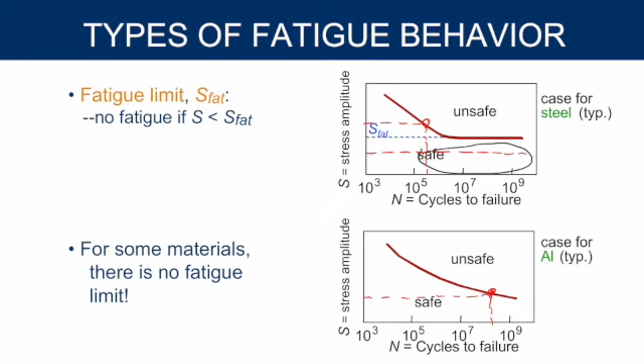Okay, so the whole idea is that cracks will grow incrementally. We're adding energy to the system when we put a force through a distance on a material. That energy has to be dissipated, typically through crack growth. Or the other way would be for the radius of curvature of the void to expand. That would dissipate the energy as well, and that would be a material that can self-repair. But in most cases, we get crack growth, which causes failure.

Okay, so let's take a look at this. So we model this as the change in the length of the crack over the number of cycles gives us a change in the K constant. This K constant was A over rho sub t to the square root, and this will also grow because the length is growing over time. So this is equivalent to a change in stress, which is related to the square root of the length of the crack, the change in the length of the crack.

Okay, so we can model that, like I said before. There's a toughness value that can be defined for any material, K1C. That number is essentially constant, but it's the crack propagation that changes, and that's related inversely to the stress that the material can handle. And this says sigma c is the critical stress, so essentially it's the yield stress that would cause failure. Okay, so what happens here is even though the K may be smaller than it was the material originally had, over time that will grow and the cracks will propagate.

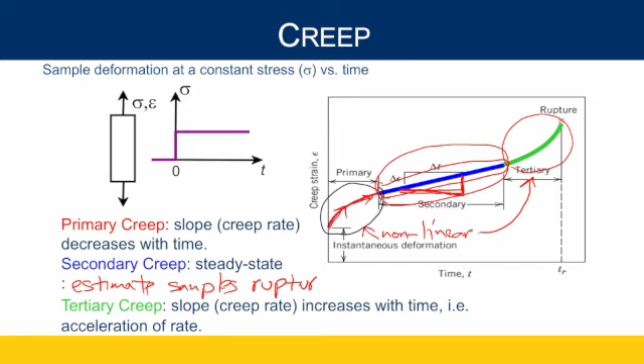So how does creep respond? Again, it uses the same equation we've used in the past: if we increase the temperature of a material, its likelihood to creep or change length with constant stress increases exponentially. We're using the exact same equation we've already used about three or four times in this class. This time it's the rate of strain, deformation with respect to time. We have our K constant we've talked about, and stress exponentially changes with the inverse negative of the temperature.

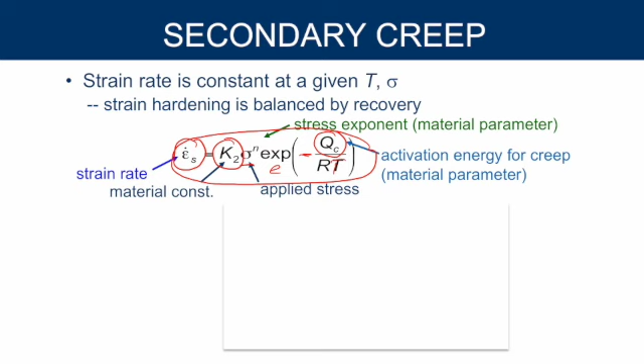So again, there's an activation energy for creep, a number you would either experimentally find or look up in a table. And you have the exponential corresponding to temperature. So what does that look like if we graph it out? If we take the natural log of each side, we can get a straight line, which has a constant slope. So the word I just used may be useful for the question I asked previously.

And as we see, as temperature increases, the amount of stress needed decreases dramatically, which means the strain increases dramatically with temperature. So you need less stress, you get more strain. That's what this equation says, right? An exponential increase in strain. The other way to look at it, since stress and temperature are on the same side, they're inversely proportional to each other.

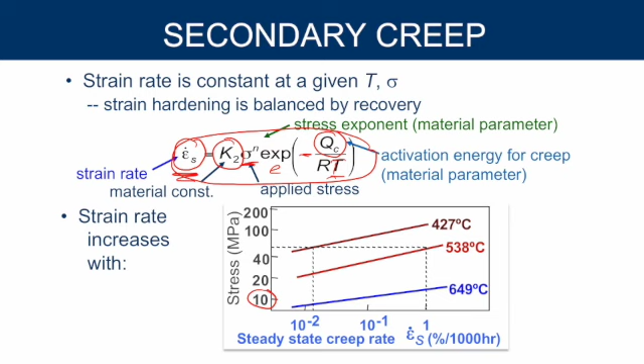So if we want something to strain or fail in creep, if we heat it up, it'll strain much quicker. Okay, so let's do an example of that.

Again, instead of using the calculation, a lot of these materials have been tested for creep - different types of iron, different types of steel, alloys - and they create tables that essentially take the exponential result and graph it so that we can just read off the numbers we're looking for with respect to temperature, rupture time, and stress.

So this is an example of one of these graphs. This one is for iron, and this is the graph of stress. Stress is on the y-axis. On the left side it's in megapascals, on the right side it's psi. You'll see that a lot, especially when we get into other calculations, especially phase diagrams - different units on the two axes so we can do easy conversions from one to another. On the x-axis we have a constant, an equation that solves for a value related to how long it takes for a material to rupture and its temperature. In this graph, the temperature is in Kelvin and the time is in hours.

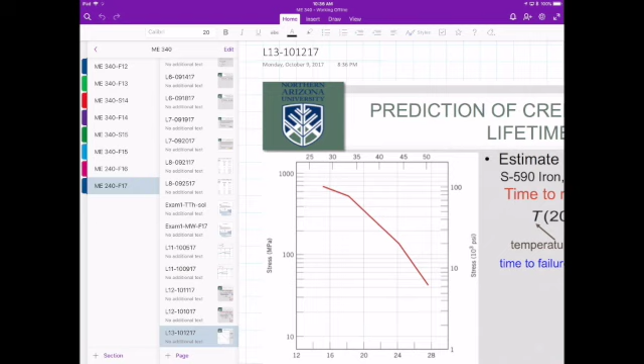So I have a question here. If we have a temperature of 800 degrees C and a stress of 20,000 psi, how long will it take to rupture? So we have our prediction of creep.

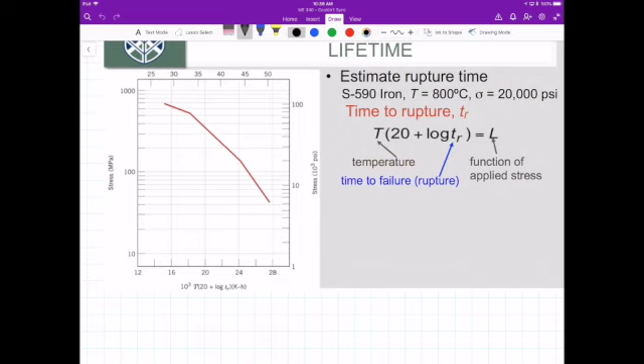Let's do a calculation here. Okay, so let's put down our givens from the problem.

This is an S590 iron. That's basically talking about how it was processed and the type of impurities in it. We'll get into some of the numbering for alloys later in the class.

We're given an x-axis related to temperature, 20 plus the log of the rupture time, in Kelvin hours, that comes right from here. So that's our dependent variable. We'll plug in the psi on the y-axis, and we can determine the temperature and time from the x-axis.

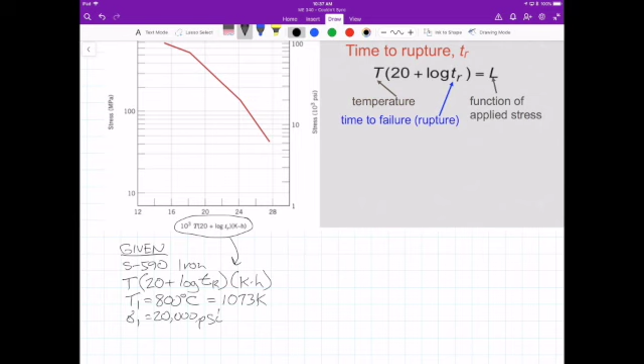Temperature given was 800 degrees C, which is 1073 Kelvin, so I'm converting that over. We're given a stress of 20,000 psi. We don't have to convert this to megapascals because it's already labeled on the y-axis on the right side. The left side is megapascals, so it basically converts for us.

I'm also going to add a second temperature. What if we drop the temperature 50 degrees C, which is pretty minimal for a metal? This would be equivalent to 1023 Kelvin. As we should predict, higher temperatures exponentially increase strain, which decreases the time to rupture. So a small drop should exponentially increase the time to rupture. Let's do that calculation and see what we get.

Okay, so the solution. Let's move this up so we can see all our numbers and our graph. We have 20,000 psi, that's our given. We just need to look that up on the graph.

So this is a log scale. We're going to see these log scales quite a bit from now on. Phase diagrams use them quite a bit as well, and a lot of the time-temperature relationships we'll talk about in class use log scales. So let's have a quick reminder of how these work.

They're based on powers of 10. So the first one would be from 1 to 10. Each hash mark would be a value: 1, 2, 3, 4, 5, 6, 7, 8, 9, 10, and they get spaced much closer as you get closer to the next 10's value. So the next group, 10 to 100, we have to count by 10s instead of 1s, so it'd be 10, 20, 30, etc.

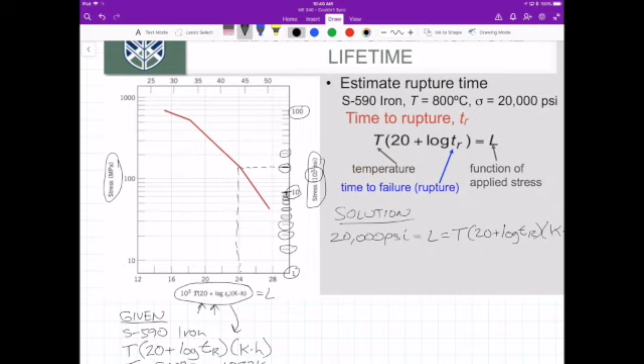This converts to what's called the L value. The L value in this case is the relationship temperature, 20 plus the log of the rupture time, in Kelvin hours. L can vary with the different types of metals you're using, so you need to make sure you understand what your x-axis is for whatever graph you're using, because this can vary with respect to the material you're testing. In this case, it's 20 plus the log of rupture time.

So all we have to do is solve for the rupture time, we have all the information we need. L is taken off the x-axis, and it's the value of 24. Look at the units, it's 10 to the third, so it's actually 24,000. So we're converting this number to an L, and that's what we use to solve.

So we use our L value, 24,000, and that equals our known temperature, 1073, times 20 plus the log of the rupture time. With that, we can solve for the rupture time. When I do that, I get 233 hours.

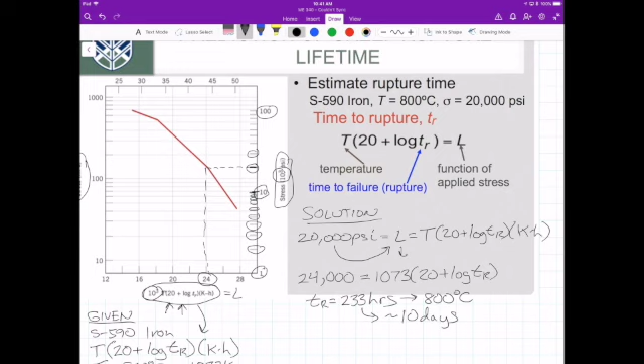Like I said, this is in hours, not seconds like diffusion. This is for 800 degrees C. How long is 233 hours? 240 hours would be 10 days, so it's approximately 10 days. So at an elevated temperature, if you stress iron at 20,000 psi, it'll rupture in 10 days. Okay, so that could be a problem.

What happens if we drop the temperature? We're not dropping it very much, just 50 degrees. We're going down to 1023 Kelvin. The equation's the same, 20 plus the log of TR. We're applying the same stress, so our L value is still 24,000.

And then we solve for TR again. So our second TR, call this TR1, this is TR2. Our second TR, just a 50 degree drop in temperature, I get a much larger time: 2,890 hours. This is at 750 degrees C.

This is approximately, let's see, 2,400 would be 100 days, so this is probably about 120 days approximately. So just 50 degrees decrease, same stress being applied to the material, the material lasts 12 times longer.

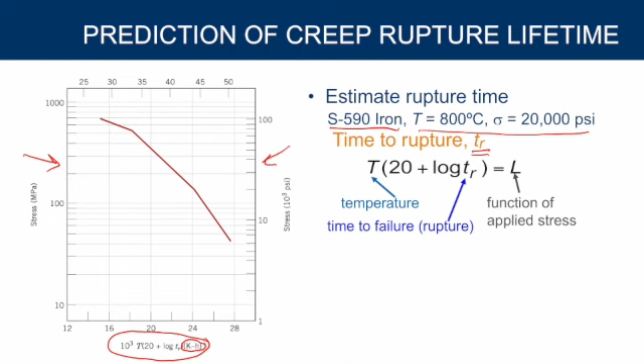Okay, so let's go on. All right, so I think now we're ready for phase diagrams. Yeah, all right, so we're moving on to chapter 9. Chapter 9, we're talking about phase diagrams.

So this is how we determine creation of solid solutions, what temperatures we can create solid solutions. If we have too high or too low of a temperature, materials are going to have more tendency to dissolve into each other. If we add too much of material, we'll get a mixture. And again, if we heat that up, we can change when the mixture becomes a solid solution. So it's similar to what we've talked about before.

If you're putting sugar into water, if you do that at room temperature, a lot of the sugar will drop to the bottom of the volume you've created. But if you heat it up, you can dissolve more of the sugar. Same thing with metals: if we put in impurities like copper and nickel, we can increase the tendency for copper and nickel to interact by variations in temperature. Then obviously the ending result is if we heat it high enough, we'll melt it.

So phase diagrams show us the melting points, the liquid phase, the solid phase, and the solid phases if things precipitate out into various regions. Okay, so we're going to be able to determine temperatures at which these occur, how many phases exist for a material over a temperature and concentration range.

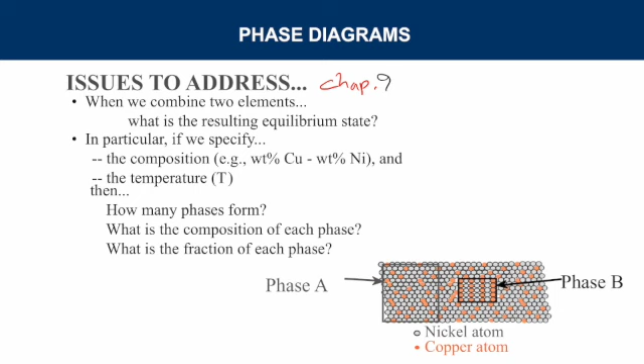All right, so solution versus mixture - this is what phase diagrams help us to determine. A solution, like we said, is a single phase. You add an impurity or a solute to a solvent. They mix together and have a single property if they're miscible together. Whereas a mixture, if we put in one phase and another phase, they don't mix, we'll get the two separate phases.

And the sugar water is a good example. If I put too much sugar in, I will still have sugar on the bottom of my volume, and I will also have water, a sugar water solution. So I have two phases. Okay, so there's limits - limits to the amount of each material we can add together, where they'll become a single phase solution versus when they separate out into two phases.

Okay, so in this example, if I heat a material at 20 degrees - so this would be room temperature - and I add sugar, this graph shows me that I can add about 65, 63% sugar to water, and I will get a single phase. That single phase is listed as liquid solution. You'll always see this on the phase diagrams.

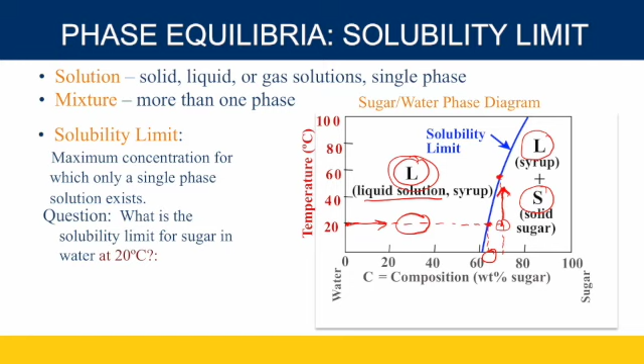Here's an example of types of phase diagrams, and it's important to understand the difference between these. If we have a one component system, which say would be water, water can go through three different phases: solid, liquid, and gas. This would be called a unary diagram. That means we're talking about pure water. There's no impurities, there's nothing else added to it, no other component besides the water. So unary, una means one, means the number of components, not the number of phases. Because a water phase diagram has three phases, solid, liquid, and gas, but unary refers to the number of components, not the number of phases.

The one we're going to talk about the most in this class are binary diagrams, which would be two materials mixed together to create an alloy. So copper, nickel, carbon, iron - those are the ones we're going to spend a lot of time on. Again, these can have multiple phases - you can have 4, 5, up to 10, 15 different phases on these diagrams. But if it's two components, it's a binary diagram. Three components or more would define complex alloys.

We need to understand what these look like, but we're not going to use them very much in class. A 3-component phase diagram is called a ternary diagram, and in that case it's a 3-dimensional diagram. They look pretty cool, actually. You have one component on the x-axis, the y-axis has two components, and then in the z direction you'll have your third component, creating a kind of surface mapped phase diagram in 3 dimensions. When they create alloys with more than 2 components, the third component is often a very small amount, so they'll add that amount and redraw the phase diagram at that region for analysis. So you can turn a ternary diagram into a binary diagram by holding one of the compositions constant. That's usually how those work. As long as we know how to read a binary diagram, we can understand ternary and other more complex diagrams.

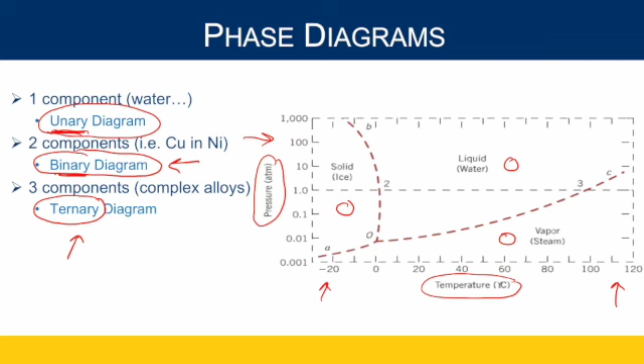How do we visualize the different phases in alloys? Again, we're going to talk about binary diagrams, so we're going to have 2 components graphed on the x-axis as a weight percent. If I have, say, 50% aluminum, I can automatically calculate the amount of copper is also 50%, so I can always go back and forth between them because they have to add up to 100. If aluminum is 80%, copper would be 20%. So one question for you that you can add to for extra credit is, what if I had 90% copper in my component?

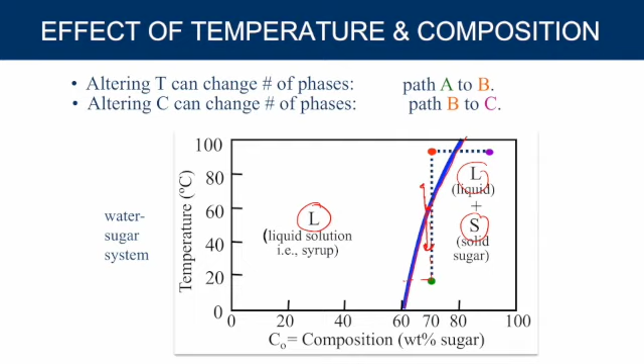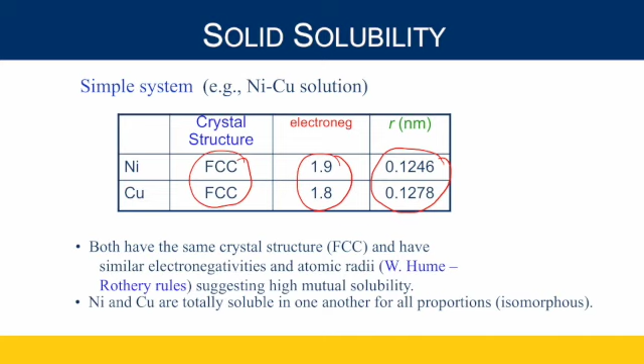Okay, so let's look at the phase diagram for copper nickel. This is a binary phase diagram because it has nickel and it also has copper.

Always read the x-axis. It tells you from 0 to 100 that we're talking about weight percent nickel. How do I figure out weight percent copper? If I just flip the numbers, 100% to 0, going in this direction, this would be the weight percent of copper, right? Because they always have to add up to 100. So if I have 80% nickel, I have 20% copper, 40% nickel, 60% copper. At any point, I always know the weight percent of the other component because they're binary and both components have to add up to 100.

So weight percent is on the x-axis, temperature is on the y. A lot of times you'll have Celsius on one side, and maybe over here degrees Fahrenheit. Also the x-axis at the top will be atomic percent, so we'll have weight percent and atomic percent. We can convert those, like we talked about before—if you multiply through by atomic weight, you can go back and forth between weight percent and atomic percent. A lot of times these graphs will convert those for you, which is kind of nice.

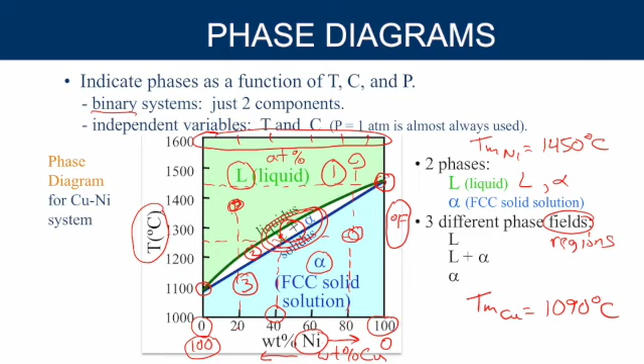But when I'm in the middle phase, it varies, right? Because some of the copper is pulled into the solid, most of the copper is in the liquid phase, and we can calculate that as well. Okay, so let's go on how to do that. Okay, so our phase diagram.

Let me take a look here.

There's one definition I want to go through first before we start calculating weight fractions and things like that. Nickel-copper phase diagrams are called isomorphous. Isomorphous means that you're completely soluble at any weight percent from 0 to 100. This is very rare. Copper and nickel have very similar properties, so they are very miscible with each other, which means they're isomorphous. Most materials are not isomorphous. There are very specific ranges. If you put too much of one into the other, you're going to get two phases of solids. So isomorphous is pretty rare.

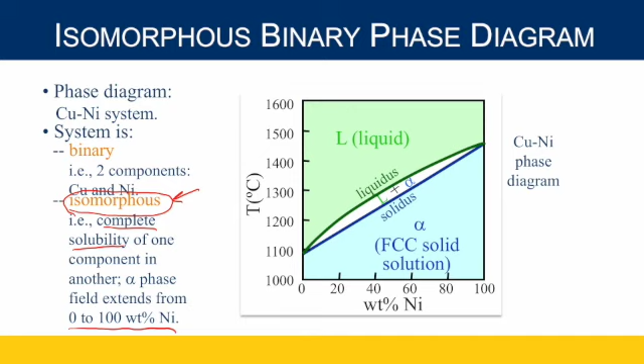So what are the rules for measuring weight fractions, compositions, and temperatures off of phase diagrams? The first rule is if we know a temperature and an initial concentration, we can determine how many phases are present. We move in the x direction and find the concentration, we move in the y direction and find the temperature. We put a point right there, and then we can see what phase region we're in. So we know the number of phases that exist as well as what region we're in.

Second rule: if we know temperature and initial concentration, we can determine the composition of each phase. We go with the concentration to a temperature. If it's a single phase region, we can read the composition right off of the x-axis. But if it's in a dual phase region, we have to do a fractional conversion, and we'll go over that in a minute. The last rule is if we know a temperature and initial concentration, we can also determine the weight fraction of each phase.

So the composition for, say, copper and nickel would be the weight percent copper, the weight percent of nickel. Whereas weight fraction would be the percentage, has no units, it's not weight percentage, it's a fraction. It would be the percentage of each phase that exists. So if we have a liquid and a solid phase, we can calculate the percent liquid and the percent solid. Whenever you add these numbers up for binary diagrams, the weight percents have to equal 100%, and the phase percentages also have to equal 100%.

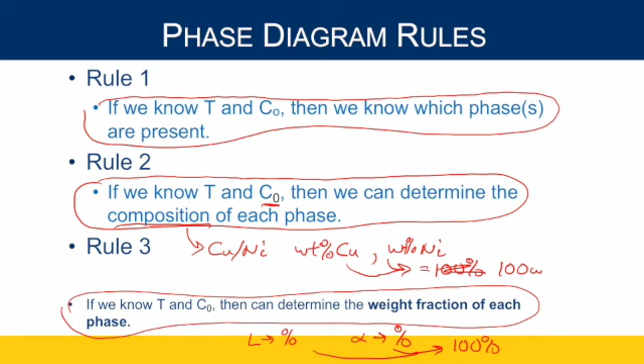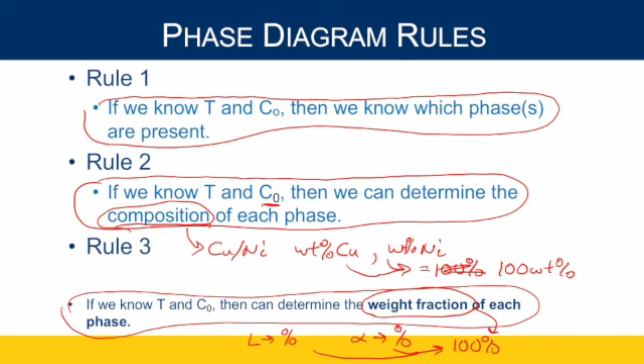Okay, let me just rewrite this. This would have units, weight percent for composition, whereas weight fraction does not have units, it's a fraction. That'll be important as you go along, because if you write those incorrectly, you will lose points on homeworks as well as tests. So you need to make sure you understand the difference.

So what's happening in these phases? So we have this phase diagram. This is our copper-nickel phase diagram again. We're just looking at a small region, and you'll see this a lot with a lot of our phase diagrams. Say, copper and nickel, carbon and iron is a good example. To make steel, there's a very small range of carbon that can be added to iron to create steel. So there's really no reason to show the entire phase diagram from 0 to 100. They only show a very small region because that's the only usable region. The other parts make unstable materials.

So what's actually happening to the material? Let's start with the liquid phase. We've heated up to, in this case, we're at about 35 weight percent.

Nickel. And if we heat it to 1300 degrees, the entire copper nickel is liquid. They're one phase, one liquid phase. If we looked at them, it'd be like looking at a cup of water - one phase, one water. It's our copper nickel solution.

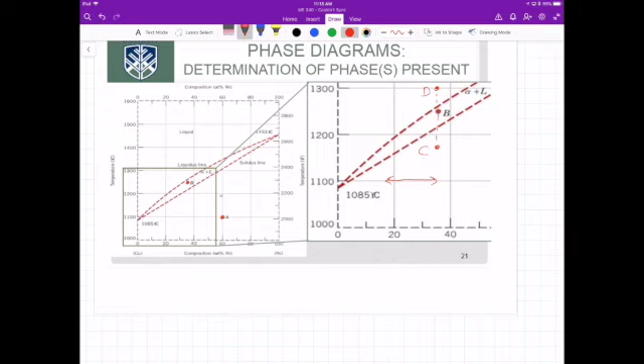But temperature is something we can control. We can take our material, 60% nickel, and we can heat it up and down and change phases. All right, so let's go through these rules using this phase diagram.

So the first rule: if we're given a temperature and an initial concentration. The initial concentration is the metal that I purchased, known to have, say, 60% nickel in it. That's not going to change. Even if I change the temperature and move into different phases, overall there's still 60% nickel. The only thing that happens is some of the copper moves into one phase and less copper moves into the other phase, and that's what we're going to be calculating. But overall it always adds up to the initial concentration, what you purchased from the vendor. So the first rule: given a temperature and initial concentration, we can determine the number of phases.

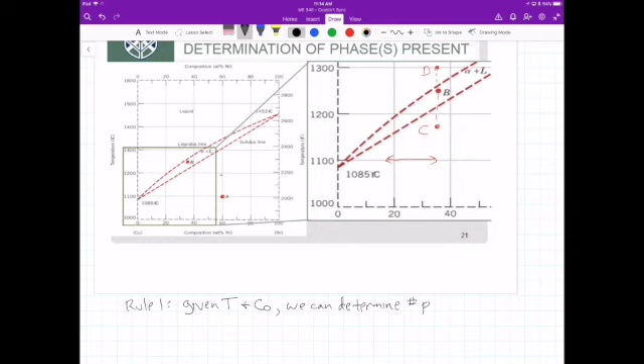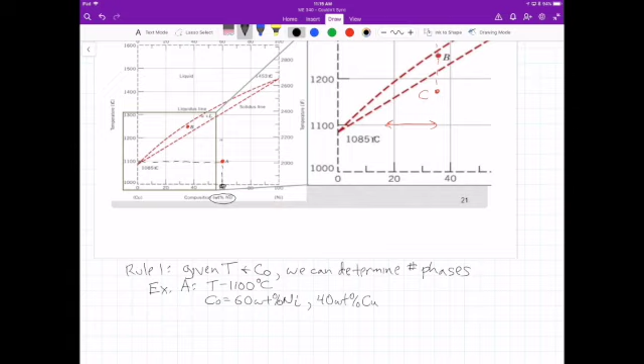All right, so let's use point A as our example. We are given a temperature, right? To get to point A, it has to be 1100 degrees Celsius. And our initial concentration we can read off the graph at any time. That doesn't change. So our C naught is 60, look at my x-axis, 60 weight percent nickel. So how much copper do I have? Subtract it from 100, 40 weight percent copper. You can always calculate the other component just by subtracting from 100.

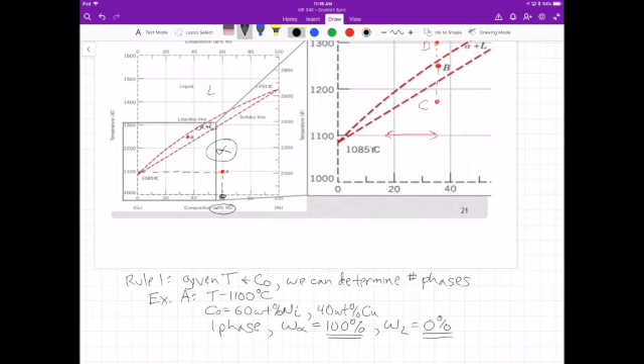So how many phases exist here? They're labeled: I have alpha, this is alpha plus liquid, and this is liquid. There's only one phase in this region. A is fully in that region, so our answer is one phase. The way we write that is the weight fraction of each phase, we call that W, and we write the phase's Greek letter. In this case it's alpha. So the weight fraction of alpha would be 100% because there's only one phase. The other phase that can exist on this diagram is liquid. What would be the weight percent of liquid at this temperature? Hopefully this isn't a trick question, because just like compositions, the weight fractions have to add up to 100. If I already have 100%, the liquid obviously has to be 0. And you can see that off the graph, we're well below the line of melting, therefore there is no liquid, therefore 0 is our answer for the other phase. So if you have one phase, that weight fraction is automatically 100%.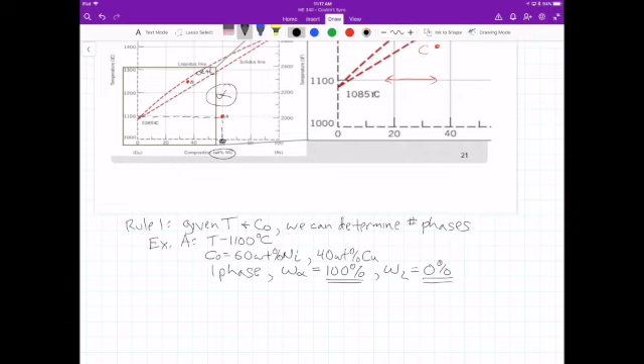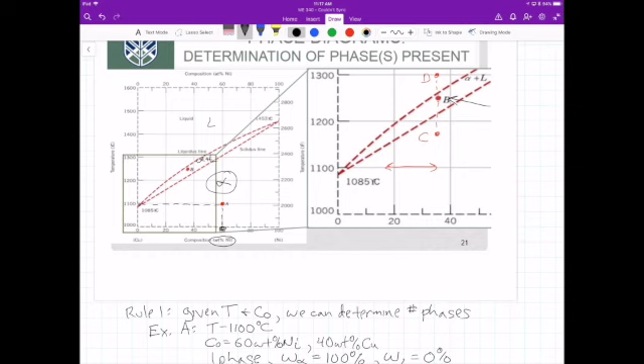All right, so let's do point B. I'm going to zoom in, let's use this side, it's a little easier to see B on this bigger graph. How many phases exist? Rule 1: we're in the alpha plus liquid region, which means we have 2 phases.

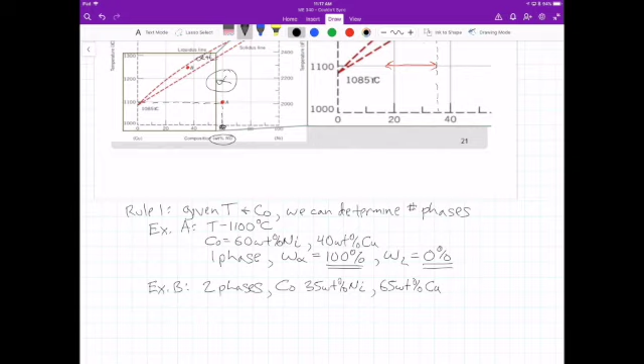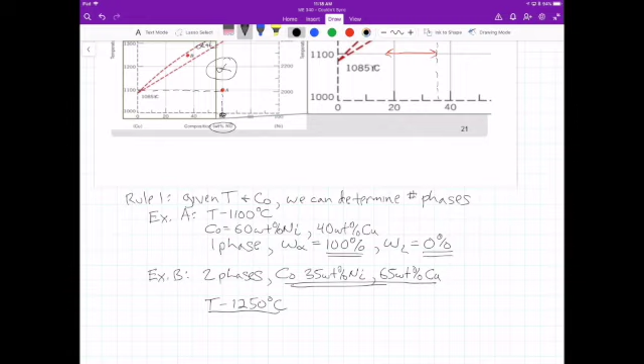And what is the initial concentration? Again, the initial concentration doesn't change, we always just go straight down and read it right off the graph. In this case it's 35 weight percent nickel, which means there's also 65 weight percent copper. And what's the temperature? We had to have a given temperature and initial concentration. We have the initial concentration. The temperature of B, just go horizontally, is at 1250 degrees C. So with a known temperature and concentration, we can see the number of phases.

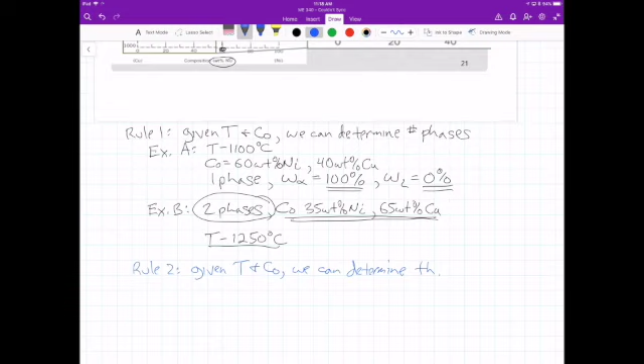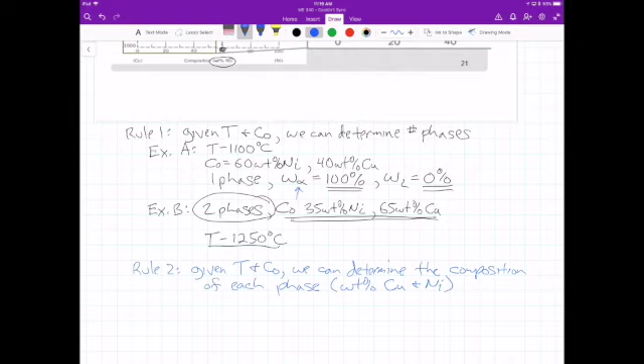So that's rule 1. Rule 2: given a known temperature and initial concentration, we can determine the composition of each phase. Composition is weight percent of the material, in this case copper and nickel. Whereas the amount of each phase is not a weight percent, and it's not related to the amount of nickel or copper, it's the amount of solid or liquid, and it's a fraction.

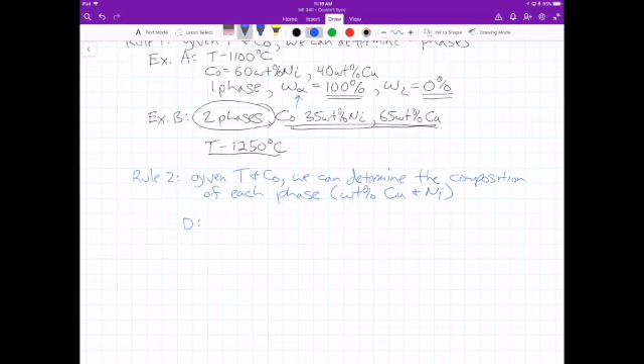Okay, so remember that. All right, so let's do point D. We're given a temperature and concentration. Since point D is listed, we can get that. The temperature is 1300, composition is the same as the other point, 35%. Let's write that down. So temperature equals 1300 degrees. Initial concentration is still 35 weight percent nickel, 65 weight percent copper.

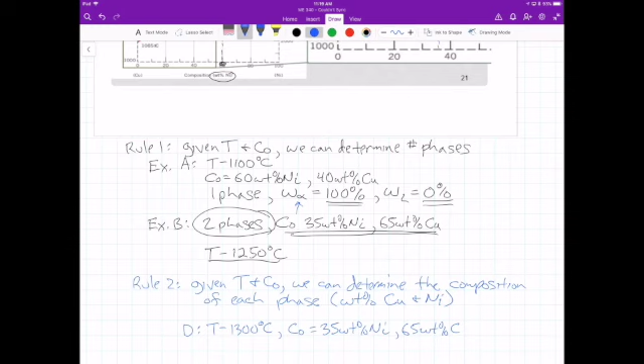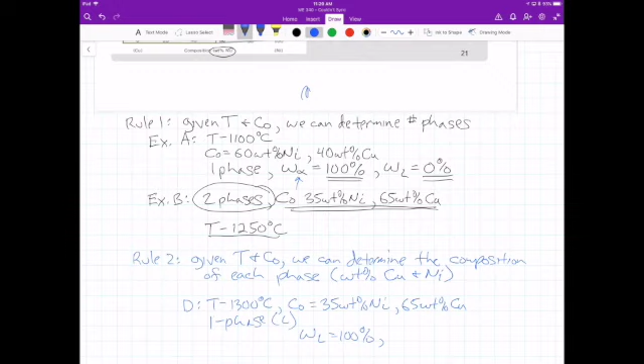How many phases exist at this temperature? We're in the liquid phase region, so we have one phase. That phase is all liquid. So if we're going to do weight fraction, we do weight fraction of liquid equals 100%. The weight fraction of solid would be what? 100 minus 100 is 0. So there's no solid at this temperature.

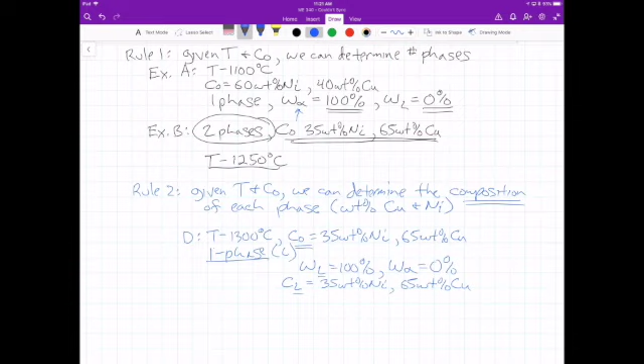If there's only one phase, then my initial concentration also equals the composition of the phase. So if it's all liquid, then the concentration or composition—you can use those interchangeably—of the liquid would be 35 weight percent nickel, 65 weight percent copper. So the subscripts we use are important because they determine what phase we're in, what material we're talking about, and we can compare them that way.

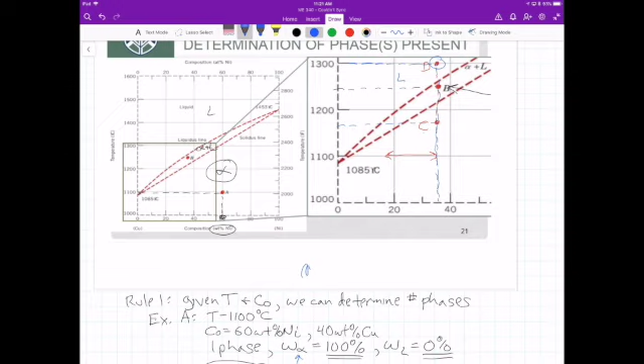Okay, so let's do point C for rule 2. Point C, we're down here now. Looks like we're at about 1160 degrees—let's say 1170. So temperature is approximately 1170 degrees C. The initial concentration is still 35 weight percent nickel and 65 weight percent copper, right?

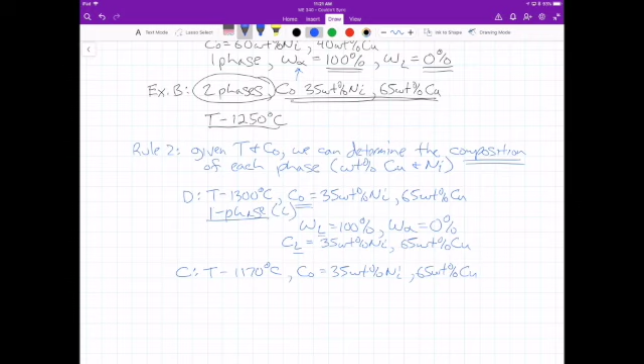How many phases exist? We're in the alpha phase. There's only one, so everything's solid. So we have one phase. That phase is alpha.

So if that's the case, the weight fraction of liquid, weight fraction of solid—if we're completely in the solid phase, there's one phase, we have to have 100% of that phase, which means we have 0% of the other phase that exists. And again, the concentration, since there's one phase, is the same, but this time the concentration is in the alpha phase, and that would be 35 weight percent nickel, 65 weight percent copper.

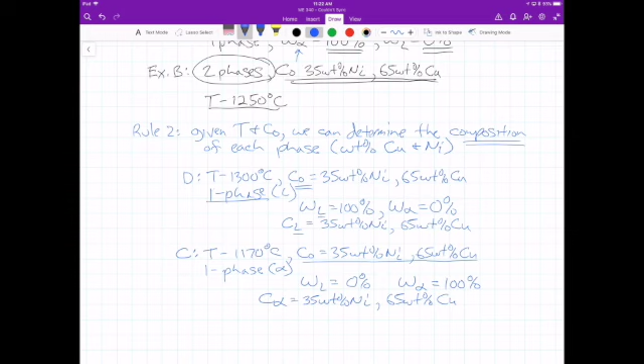So let's look at B. Point B gets a little more complicated, but the math is actually very simple. What's going on at point B? We are in the dual phase region. We have liquid and solid that exist in this region. Okay, let me write that down first.

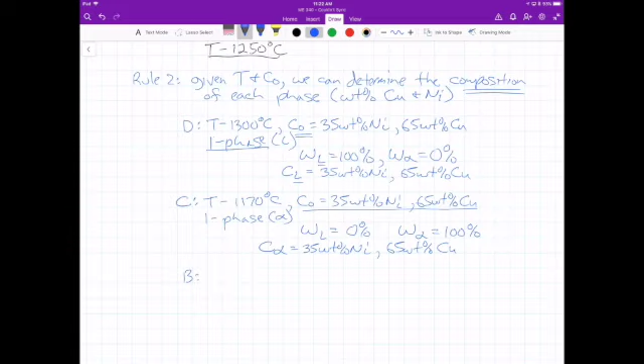We're at a temperature—let me write the temperature real quick, sorry. Looks like about 1250. Temperature, 1250 degrees C. We have two phases, liquid and solid. Our initial concentration, like I said, is always the same. We bought this material at 35 weight percent nickel, 65 weight percent copper, and we're just changing the temperature. But how much of each of these materials exists in each of these phases? That's what we need to calculate.

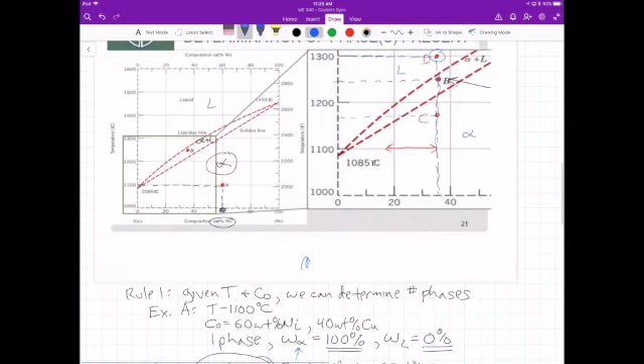So since we have two phases, we have two concentrations. We have concentration alpha, and we have the concentration of the liquid. This is really easy. When we have two phases, we just have to go horizontally until we reach the phase lines. So we're in the dual phase region, we go horizontally until we reach a phase boundary. The phase boundary on the left is the liquid phase boundary. The phase boundary on the right is the solid phase boundary.

So to measure the composition, the amount of nickel and copper in each of these phases, we just go straight down from the phase boundary, and that gives us the value for each one, right? So if I go to the left, I hit the liquid—this is the concentration of nickel in the liquid. If I go to the right, to the solid line, this is the concentration of nickel in the solid. So what would those values be? Looks like about 32 here, and this looks like about 45—let's say 44.

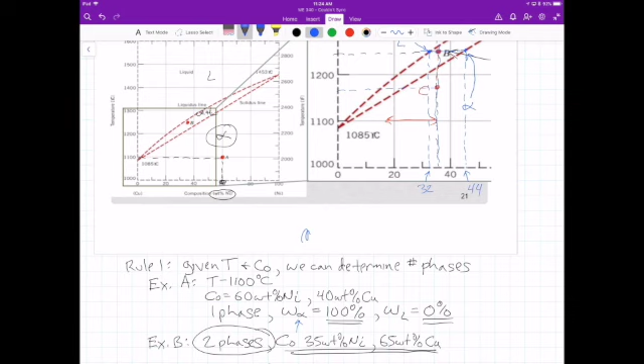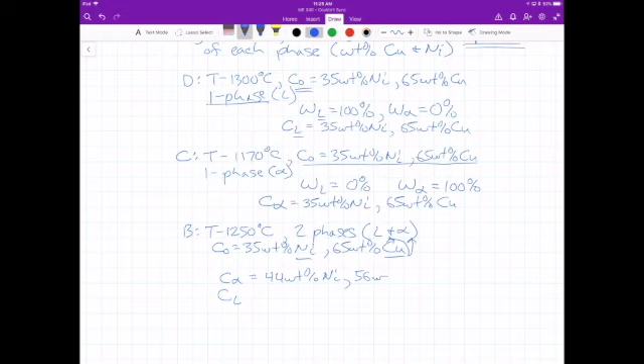Okay, so how would I write that? The solid phase was 44, so 44 weight percent nickel. How much copper do we have? 100 minus 44, 56 weight percent copper. The liquid line, we go to the left and then down, we get 32 weight percent nickel. How much copper do we have? 68 weight percent copper. So what does this mean?

These values—again, the initial concentration, like I said, is always the same. So what we're seeing is there's a tendency for more nickel to be solid than its initial concentration, and less nickel to be liquid than this initial concentration. So this is just a fractional average. The weight fraction gives us the amount of each, and if we multiply the weight fraction by the concentration and add them together, we will get this number.

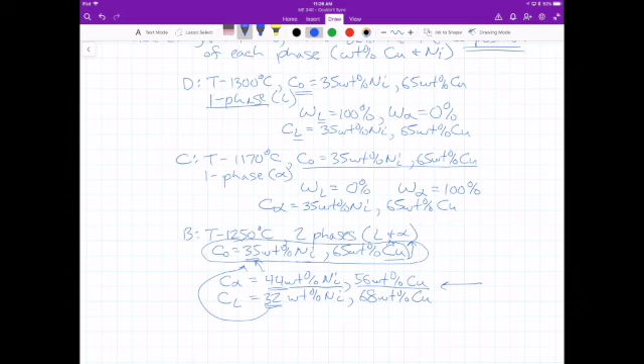So we have our composition or concentration of each. When we have that, it's always in weight percent, and it has the element, the component that is added as part of the units. So there's our answer for that one.

Then rule 3 was the weight fraction calculation, so let's do that one. Go back to black. Rule 3: if we have a given temperature and initial concentration, we can determine the weight fraction of each phase.

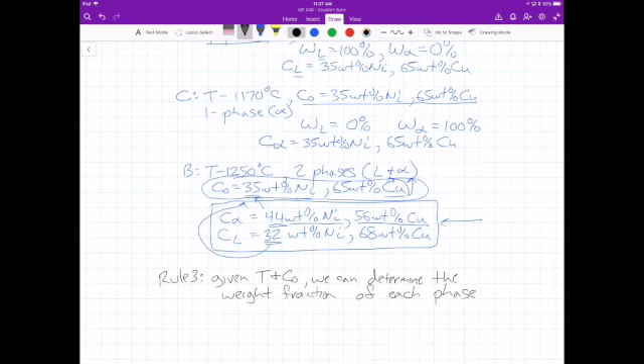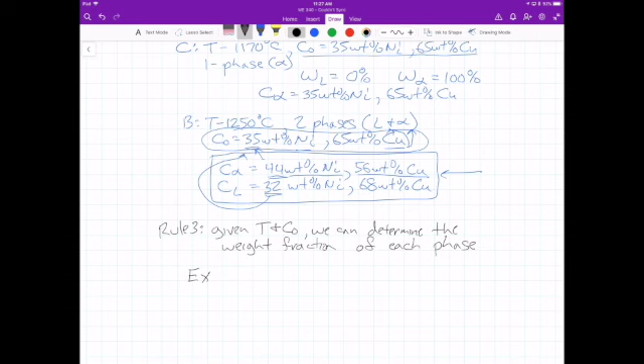Okay, let's just do point B, because that's the only one that has multiple weight fractions. We already wrote out the weight fractions for C and D and A up here, right?

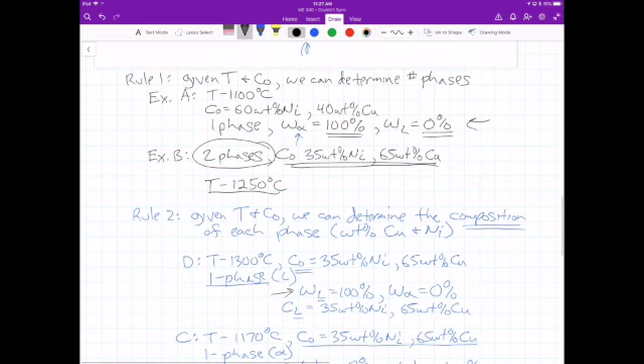D was 100% liquid, 0% solid. C was 100% solid, 0% liquid. And then A was way up here, it was 100% solid, 0% liquid as well. So those are already calculated. One phase, you already know your weight fractions.

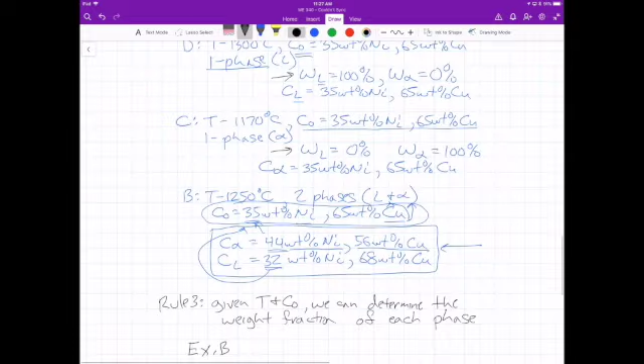For this, we need to use the lever rule that I talked about. So let's look at this line, I'll try to draw it in different colors here. We have a distance from our point to the liquid phase line, and a distance from our point to the solid phase line. Let me just draw this off to the side. We have a line, got the red, we have our point, and we have the green, and we have our phase boundaries on each side. This is what we use to calculate weight fraction, and it's the lever rule.

Because basically, like sum of moments, if you want the liquid side, you use the opposite length. If you want the solid side, you use the other length. Okay, so what does this mean?

At this point, is there more liquid or solid? The liquid line is on the left. We use the line on the right, which is longer than the other line, which is the solid line. So that means there's more liquid in this.

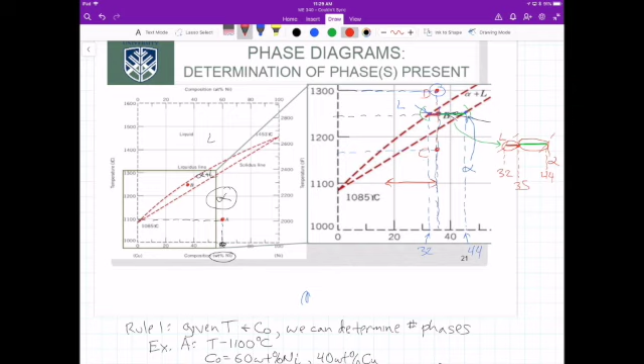So how do we calculate that? We need to know the composition values, the 32 and the 44, and we need to know our initial composition, the 35 that we were given for this material. If we have those numbers, we can calculate the lengths of the lines, right? So we just subtract the differences, okay, so I would do that.

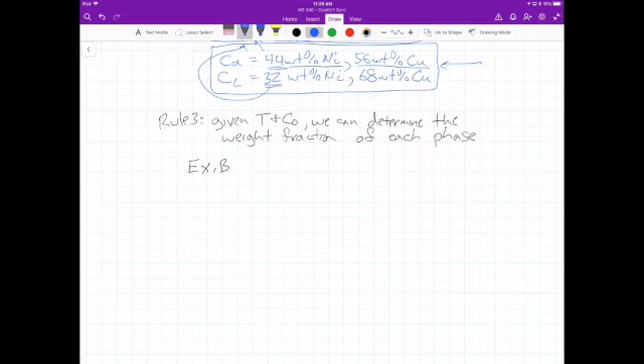So my numbers are 32, 35, and 44. If I want the weight fraction of the solid and the weight fraction of the liquid, those are my two phases. What fractions do we have?

If I want solid, I have to use the line that starts from the liquid line to my point. It's across, opposite of the solid line. So to calculate that, I would take my initial concentration, subtract the concentration at the liquid line, over the entire length of the line, which would be the solid minus the liquid. That would be taking the little region 35 minus 32 weight percent over the entire length of the line, which would be 44 minus 32.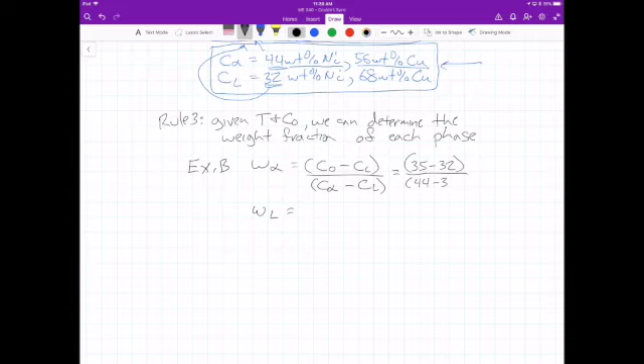So this is what I'm doing here. I'm going to go back up here. The solid, I use the smaller line. The smaller line has a width 35 minus 32. And I'm comparing that to the entire length of the line, which is 44 minus 32.

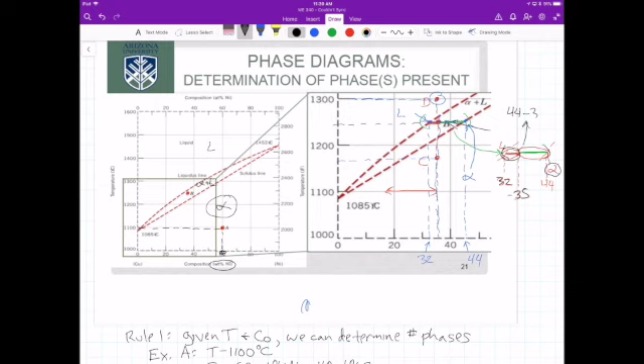So I do the same thing for liquid. I have to flip them, right? I have to use the line that goes from the solid to my point to calculate the amount of liquid. That's the lever rule. So instead I start with C alpha, my solid concentration, subtract my C naught, over the entire length of the line, which would be C alpha minus C liquid.

I plug in those numbers. I get 44 is my alpha, 35 is my C naught, over the entire length of the line, 44 minus 32. Also remember, weight fraction of liquid plus weight fraction of solid must always equal 100%. Therefore, you really only have to calculate one of these, and then you can always just subtract from 100 to get the other one.

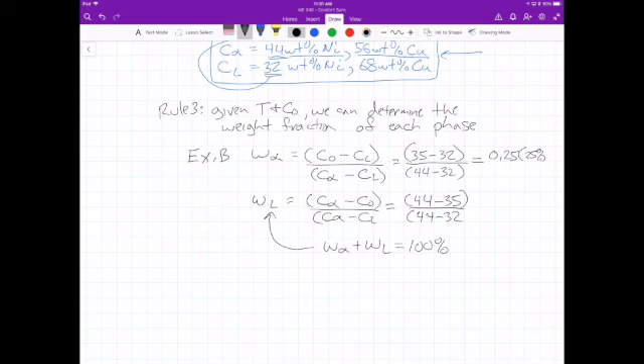Well, let's calculate these out. This one up here, I get 0.25, which is 25% weight fraction of alpha. This one I get obviously 0.75 or 75% weight fraction liquid.

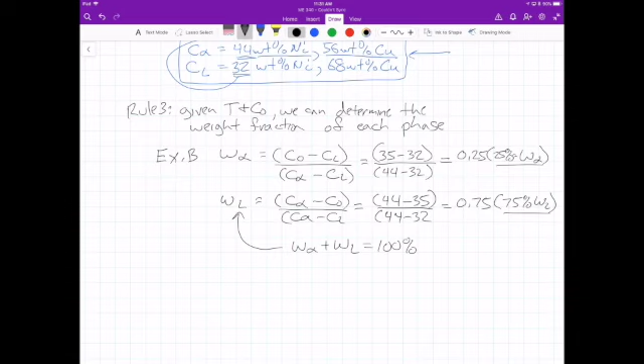So at this given point, point B, which was at a temperature of 1250 degrees, and initial concentration of 35 weight percent nickel. Let me look at that real quick. You see that this length of line versus this one, the green line is 3 times longer, and it's opposite to the liquid line, which means it's the weight fraction of liquid. So the amount of liquid is 3 times more than the amount of solid, and that's what the weight fraction tells us.

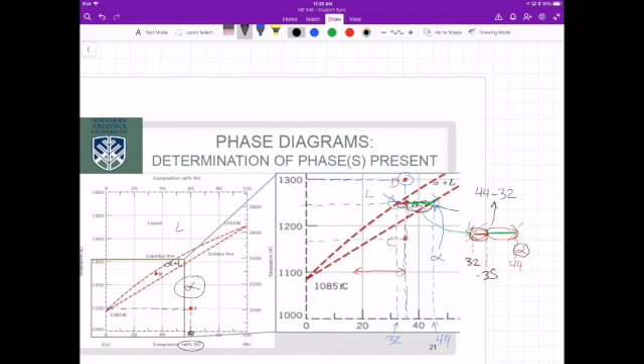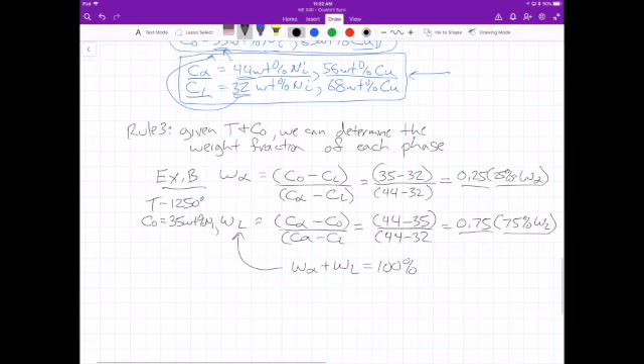Okay, then again, like I said, if you have these numbers, weight fraction, and you have the compositions in each phase, if you multiply those together, you get a weighted average, which will give you your original concentration again. So if I take the concentration of the solid, multiply that by the weight fraction of the solid, plus the concentration of the liquid times the weight fraction of the liquid, I will get my C naught. Because C naught never changes, unless I melt the material and add more of another component, which is not really practical. So this always has to stay the same. It's just that we're moving copper and nickel into different phases at different locations.

Okay, so if I put in my numbers, C alpha was 44 weight percent nickel. The weight fraction of alpha was 25.

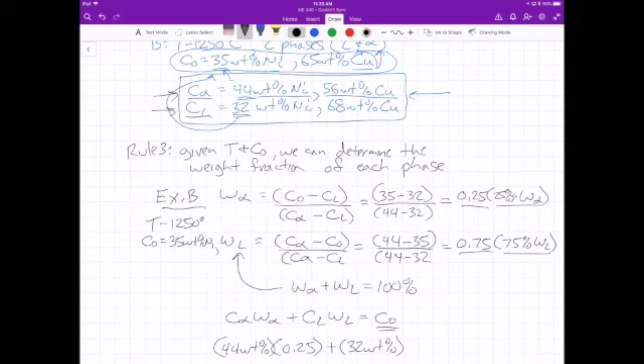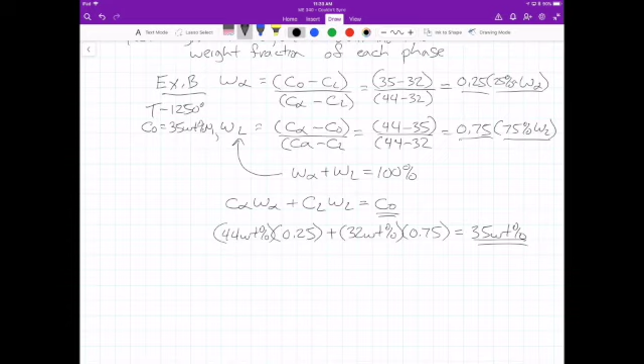Plus my concentration of liquid, which was 32 weight percent. Taking those right off of here, 44 and 32, and there's 75% liquid. If I multiply that through, I will get my C naught, which is 35 weight percent. All right, let's go on to the next part here.

All right, get this started again. Oops, why is it drawing? Thinks my finger is the... Okay, let me just move to the next one.

So why do we want to change the composition of nickel and copper across a range from 0 to 100%? Well, this is called alloying. We're making solid solutions, strengthening the material typically. But there are limits, and that's why we create phase diagrams to determine what kind of properties we get from that.

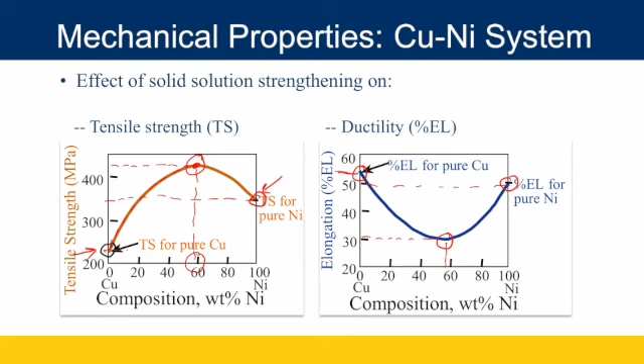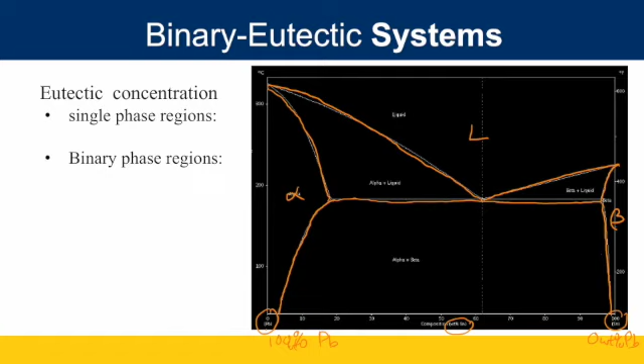So the tin-lead can be incorporated, and we get these different results. We get a region here called alpha, and we can always define the regions by their boundaries. Up here is the liquid region, and then we have beta over here. So there are three main phases, right? Our single phase regions are three, and then we can determine the other ones.

So if we move horizontally between regions, we can define the compositions in those regions. In this case, this kind of shark-tooth shaped region up here has alpha on one side, liquid on the other — that means this is an alpha plus liquid region. And over here we have a liquid plus beta region, so if we go horizontally, we have liquid and beta, which is a two-phase region as well.

And what would be the two regions down here? We have alpha on this side, beta on this side — this is the alpha plus beta region. So, binary phase regions — how many do we have? We have 1, 2, 3.

And what is the total number of regions on this graph? We have 1, 2, 3, 4, 5, 6, right? So the total number is 6. 3 of them are dual phase regions, and the other three are single phase regions.

So from that we can determine if we're in the single phase regions, we can calculate weight fraction and composition automatically. This is 100% alpha, 100% liquid, 100% beta, and if we go straight down we can get our compositions. But if we're in the dual phase regions, we have to use our horizontal line connected between the two phase boundaries. We get our compositions from the phase boundaries and the weight fraction from the length of the line from our C naught.

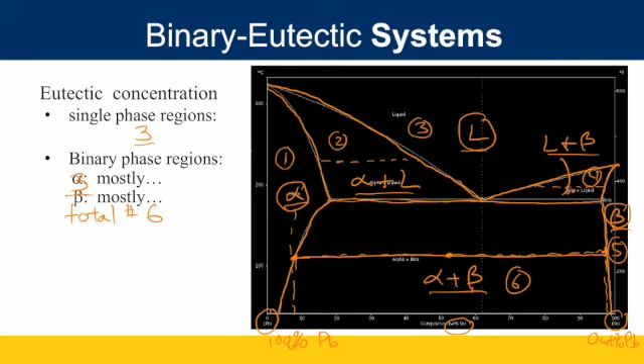All right, so there's some interesting points here. In this case, alpha is a single phase region. This is a solid solution. There's tin in there, but there's also lead in there, right? But there's just enough of each that it causes one phase, an alpha phase. Whereas in beta, there's tin and there's also lead, but they have one single phase. If I add too much or too little, I get two-phase region, the alpha plus beta region.

But what is mostly occupying the alpha region? We can read that right off of the graph. This is 0 to 100% tin. So in the alpha region, there is very little tin. So that means most of the alpha region is lead.

Whereas the beta region, we're near 100% tin. Beta is mostly tin. And then, just so you know, lead has the periodic table value Pb, and tin has the periodic table value Sn.

Oh yeah, and there's another line. So we have an interesting region where you go from completely liquid to two solids automatically, right? This is the only point that happens. If we're at any other composition, we are going to cool the material. It's going to go to the liquid. Part of it's going to stay liquid, some's going to stay solid, and then it'll completely solidify. This is a unique point, has unique properties.

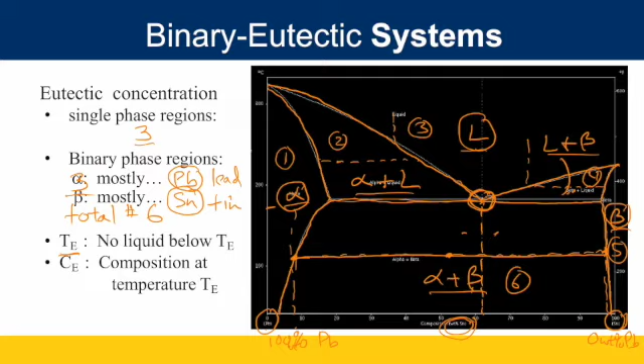Okay, so again, let's look at what's occurring here, and then we'll finish up this lecture. So we went through this before. When you heat it up all the way to the completely liquid phase, you have your glass of water. You just have water, you just have the one phase. In this case, we have a tin lead water solution, one phase.

As we cool it though, if we're in this region, we'll go through a liquid plus solid phase. We'll start seeing our ice cubes, right? We have our liquid, but parts of it start to turn into kind of floating icebergs or ice cubes in the ocean. And as we get further down, the ice cubes get bigger until they occupy the entire space.

Then we'll hit a single phase region. Our ice cubes grow until they freeze the entire fluid.

And then in the next region, we get precipitants. So this is kind of like the sugar liquid solution. Everything's balanced, everything's dissolved into a single solution, but as we cool it, some of the sugar starts to come out of solution and it precipitates.